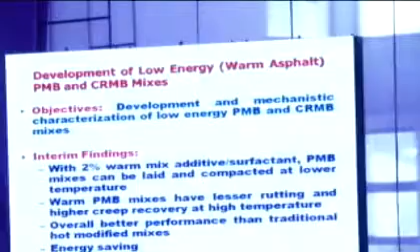First, development of low energy warm asphalt, PMB and CRMB mixes. The objective is development and mechanistic characterization of low energy PMB and CRMB mixes. Interim findings reported are that with 2% warm mix additive, polymer modified bitumen mixes can be laid and compacted at lower temperature. Warm PMB mixes have lesser rutting and higher creep recovery at higher temperature, with overall better performance than traditional hot modified mixes and energy savings.

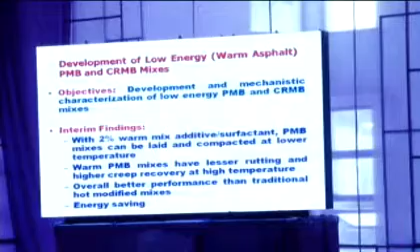Next, study on use of emulsion based warm mix asphalt using half warm aggregates for bituminous road construction. The objective of this R&D project is to investigate performance of emulsion based half warm mixes. Test sections have been laid near Gondal in Gujarat on NH-27, and it has been found that rutting resistance, indirect tensile strength ratio, and resilient modulus are acceptable and identical to traditional HMA mixes. Warm mix asphalt mixtures can be prepared and laid with conventional construction equipment.

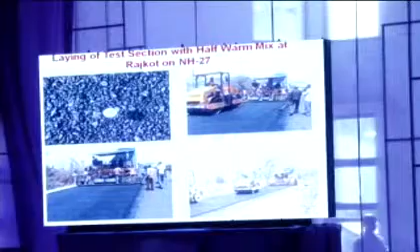These are the photographs relating to the preparation of the mixes and laying of the test section in Rajkot on NH-27. The next reported project is studies on use of reclaimed asphalt pavement, RAP, in construction and maintenance of roads.

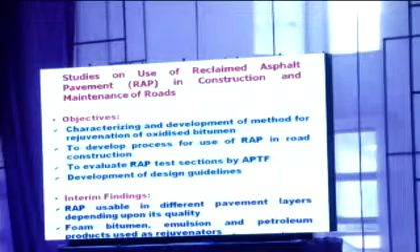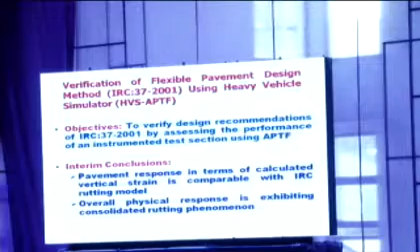Next project reported is verification of flexible pavement design methods, that is IRC 37, using heavy vehicle simulators available in CRRI. Objective is to verify the recommendations of IRC 37 by testing the test sections with heavy vehicle simulators, APTF, in CRRI. Test sections have been laid in CRRI campus and tested using APTF. Interim findings are that pavement response in terms of calculated vertical strain is comparable with IRC rutting models, meaning the observed strains are in agreement with the IRC rutting model, and overall physical response exhibits consolidated rutting phenomena.

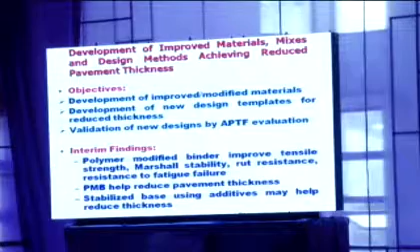Next project reported is development of improved materials, mixes and design methods achieving reduced pavement thickness. Interim findings are that using polymer modified binders helps improve tensile strength, marshall stability, rut resistance and resistance to fatigue failure of bituminous mixes, and also helps reduce overall pavement thickness. Stabilized bases are another option which can be used to reduce the overall pavement thickness.

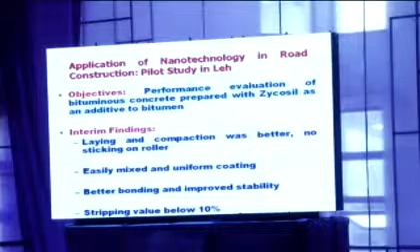Next is application of nanotechnology in road construction, a pilot study in Leh. Yesterday we saw a presentation from Zydex Industries, and the same materials have been reported in 2-3 projects. This was tested in a test section in Leh, and findings indicated that laying and compaction was better, with no sticking of the material to the roller when using Zycosil as an additive to the bitumen. The mix can be easily mixed, there is uniform coating of aggregates, better bonding, improved stability of mixes, and stripping values observed were less than 10%.

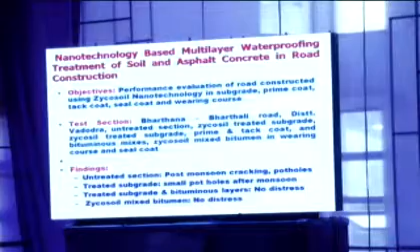It has been observed that in the untreated section where there was no Zycosoil, post-monsoon cracking and potholes were observed. In sections where Zycosoil was used only in subgrade, small potholes after monsoon were observed. But when Zycosoil was used in all the layers, there was no distress on those test sections. This suggests Zycosoil is proved to be a wonderful material, as the findings of these projects have shown.

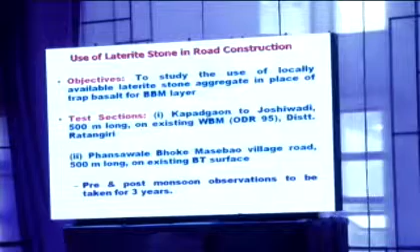Next is use of laterite stone in road construction. The objective of this study is to study the use of locally available laterite stone aggregate in place of trap basalt for BBM layers. Test sections have been laid in Kapadgaon to Joshiwadi and Masebao village in Maharashtra. The first section was laid on existing WBM surface, and the second test section was laid on existing BT surface. Pre and post monsoon observations have to be taken for 3 years, and interim findings are awaited for this project.

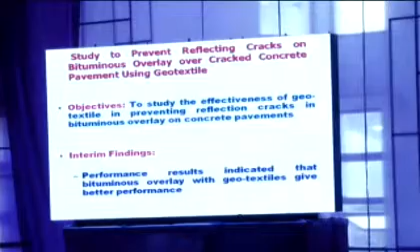Next project reported is a study to prevent reflection cracking on bituminous overlays over cracked concrete pavement using geotextile. Whenever a bituminous overlay is placed over an existing concrete surface, the joints get reflected into the overlay. Geotextile has been used to minimize this reflection cracking under this project, and it has been observed that bituminous overlay with geotextile gives better performance, mitigating the occurrence of reflection cracking in bituminous layers whenever placed over existing concrete pavements.

Next is resource mapping of road construction materials in Kerala, Thiruvananthapuram district. Under this project, whatever material is available in Thiruvananthapuram district has to be characterized, with all data relating to properties like specific gravity, water absorption, AIV values, elongation and flakiness prepared on a GIS platform so it can be readily accessible and usable by users.

Findings say that these locally available materials are fine for all other properties, but the combined elongation and flakiness index requirement as per MORTH is not fulfilled. Researchers have asked that in case of locally available material, MORTH guidelines should be relaxed so that they can be used at local levels.

Now come to the R&D projects which have been reported in rigid pavement sections. This time only 3 projects have been reported.

nothing is ongoing or completed.

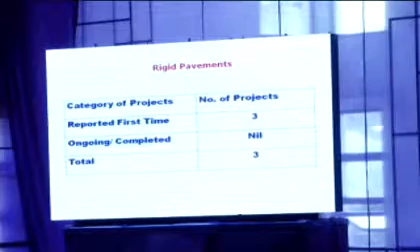This is really a matter of concern for all of us, because the future of Indian roads belongs to concrete pavements, and we need to carry out more and more research in concrete material as well as in concrete pavements. So I hope we all will take note of this.

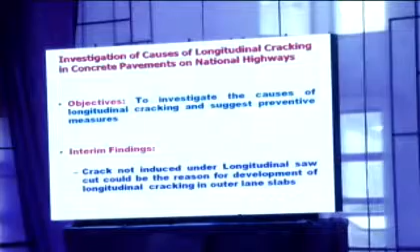Whatever projects have been investigated is investigation of causes of longitudinal cracking in concrete pavements on national highways. Something which does not crack is not concrete. In fact, during construction, we help concrete to crack by sawing the joints. We design concrete pavements in such a way that full depth transverse cracking will occur in the middle of the slabs near the expiry of its design life, that is 25 to 30 years. But...

In the last 8-10 years, whatever concrete pavement sections have been laid on national highways, many of them have shown premature longitudinal cracking in the outer lane. A project has been taken to investigate the reasons for this cracking. There are few known reasons, but there may be some unknown reasons as well, particularly responsible for Indian conditions.

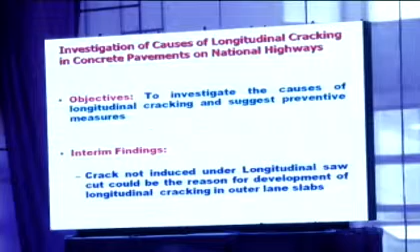Interim findings, from whatever work has been carried out so far, say that longitudinal saw cut joints between the outer lane and shoulder have not developed cracks under it. It should have happened, because that is the purpose of sawing the joints. Since the joint has not occurred, you can see these saw cut joints - the core is showing the saw cut joints, and there is no crack under this. This could be one of the reasons that cracking is taking place in the middle of the outer lane. And this has happened on all sites.

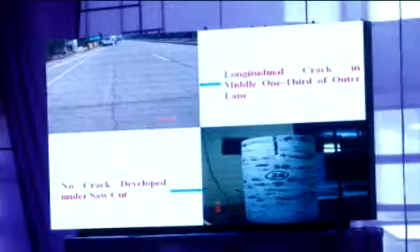So we are putting a joint between shoulder and outer lane. We have to think about whether it is workable, or whether we should go for deeper saw cut depths at these longitudinal joints so that the crack happens there. Normally it is 1/3 to 1/4, but I feel we need to increase the depth of saw cut in case of longitudinal joints. In case of transverse joints, it is fine.

Next project observed is utilization of waste foundry sand in place in pavement quality concrete. Waste foundry sand is a waste product of foundry industries. It is a very fine sand, and when it has been used in pavement quality concrete mixes, it was observed that because of the higher fineness of this sand, water demand of the mix keeps increasing, and if you keep increasing the water in the mix, the water cement ratio will be high.

A downfall in strength has been observed. But up to 20% replacement of natural sand by foundry sand, we can modify the mix so that whatever increase in water demand is there, it will not lead to any downfall of the compressive and flexural strength. That is manageable up to 20%, but beyond that it is difficult.

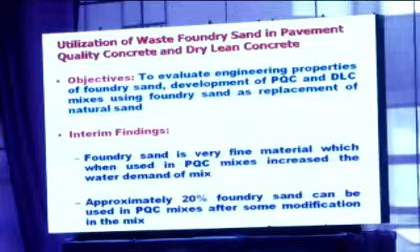Next is calcium sulphate derived from tannery fleshings for use in cement formulation. A lot of lime is used by the leather industry for tanning purposes, and whatever effluent comes out of this industry, before it is allowed to flow into rivers, some neutralization treatment has to be given to these effluents. Lime is used, and that lime can be reclaimed in the form of calcium sulphate from that effluent. That calcium sulphate can be used for the ternary and binary production of cementitious materials. This has been reported in this project.

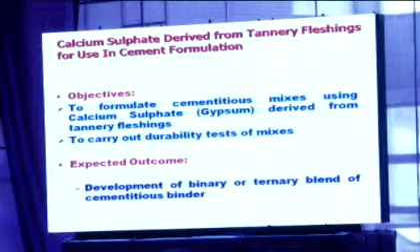Now, pavement evaluation performance - 7 projects have been reported for the first time, 2 are ongoing, and overall 9 projects have been reported. First is road inventorization and pavement condition survey on selected road stretches using vehicle mounted digital video imaging system. The objective is to prepare road inventory and pavement condition survey data for about 1200 kilometers of national highway using automated road survey systems and network survey vehicles.

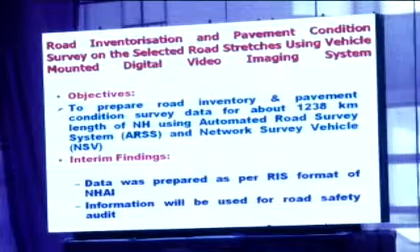So far, data has been collected and prepared as per the RIS format of NHAI. Whatever data has been collected and submitted to NHAI will now be utilized for the road safety audit of these national highway stretches.

Next reported is development of a management system for maintenance, planning and budgeting of high-speed corridors. The objective of this project is to calibrate the HDM-4 software for Indian conditions. It requires a lot of data related to pavement performance and geometrics of pavements, and time series data is being collected. We have already completed 2 series of data, calibration of HDM-4 is in progress, and the 3rd series of data will be utilized to validate the calibrated model. It is in progress.

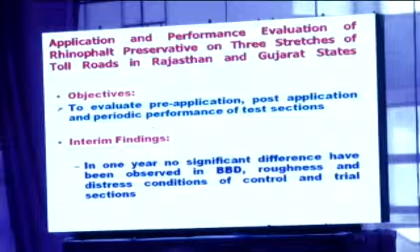Next is application and performance evaluation of Rhinophalt preservative on 3 stretches of toll roads in Rajasthan and Gujarat states. 3 test sections have been laid on toll plazas, and it was observed that in 1 year, no significant difference has been observed in BBD deflections, roughness and distress conditions of control as well as trial sections. It is hoped that in the next 2 or 3 years, the difference of using Rhinophalt will be observed by performing observations on control and test sections. But so far, no difference has been observed.

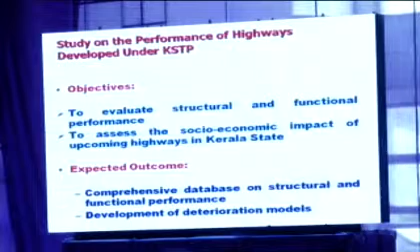Next is study on the performance of highways developed under KSTP in Kerala. The objective is to evaluate structural and functional performance to assess the socio-economic impact of upcoming highways in Kerala state. It is expected that through this project, a comprehensive database on structural and functional performance of the state highways will be prepared, and deterioration models will also be prepared that will help in assessing budget requirements for maintenance of state highways in Kerala.

Next is performance evaluation of coir geotextile in rural roads of Kerala. Coir geotextile has been used to lay few test sections where strengthening of the weak soil was required, and it is expected that innovative design procedures for long-lasting rural roads will be prepared using coir geotextiles for the strengthening of weak soils.

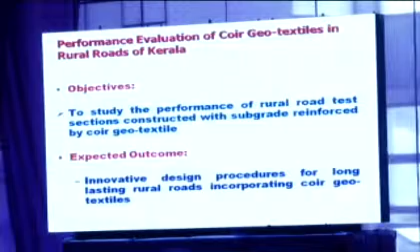Next reported is pavement performance studies, also on coir geotextile reinforcement in rural roads of Tamil Nadu. The objective is again the same, to study the performance of rural roads with subgrade reinforced by coir geotextile, and it is expected that innovative design procedures will be developed suitable for the soils which Tamil Nadu state has, with coir geotextile used for strengthening of weak subgrade soils.

Then urban pavement management system for Tiruchirappalli city. This project has been undertaken to prepare a pavement management system for urban conditions. First it will be developed for Tiruchirappalli city, and then the same can be utilized for assessing the need of maintenance and budget needs for other cities of the state.

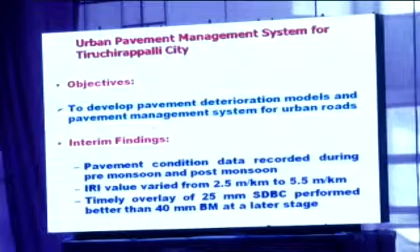Points for discussion: PMB, CRMB and emulsion based warm mix asphalt mixes. Validation of flexible pavement design using accelerated pavement testing facilities. Reclaimed asphalt pavements. Use of geotextile for better performance of pavements. Premature longitudinal cracking of concrete pavements. Development of pavement management systems.

The organizations which have reported all these research projects are CSIR Central Road Research Institute, New Delhi; National Transportation Planning and Research Center, Thiruvananthapuram; Gujarat Engineering Research Institute, Vadodara; Maharashtra Engineering Research Institute, Nasik; National Institute of Technology, Tiruchirappalli; and Messrs. Gypsum Industries. That's all from my side.

I hope next year we will be intensifying our R&D needs, and more projects will be upcoming in the area of pavement management, pavement engineering and materials, and particularly in the field of concrete pavements. Thank you very much.

Thank you, Mr. Vinod. As we observe, the presentation made by Shri Vinod Kumar has highlighted many issues important in today's context. We are all, in all sectors of highway projects, facing the problem of availability of good quality aggregates. So in the 12th plan, in the area of pavement engineering and materials, one task for researchers should be how to save aggregates.

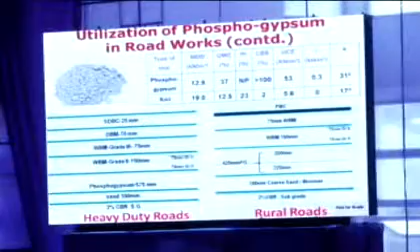The first project: utilization of phosphogypsum in road works. Phosphogypsum is an industrial waste generated from the fertilizer industry. The main objective is how to utilize this phosphogypsum for road and embankment construction. It is a low density material compared to maximum dry density, and the CBR value is very high, with good shear strength properties compared to local soil. Specifications have been prepared for heavy duty roads and rural roads. The main finding is that phosphogypsum as such is good enough for use in different pavement layers.

7% of phosphogypsum can be used in BM, DBM and SDBC mixes. 10% cement can be replaced by phosphogypsum in M40, M35, M30 and M25 concrete. For dry lean concrete, 10% cement can also be replaced by phosphogypsum.

Feasibility of cinder waste dumps for building and road construction. Cinder is a waste generated from the steel industry. This dump is nearly 70 years old and 45 meters high, and is a mixture of 80% cinder and 20% slag. The main objective is how to utilize the cinder waste for embankment and road construction, and how to reclaim the cinder waste dump.

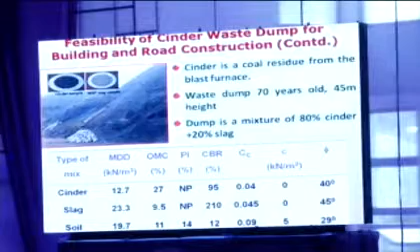The cinder and slag both have excellent geotechnical characteristics compared to soil, so this material has potential for embankment construction. 40 to 60% of the cinder material can be used as a replacement for fine aggregates in sub-base and base material. The main limitation is that cinder is not feasible for bituminous layers of road pavement.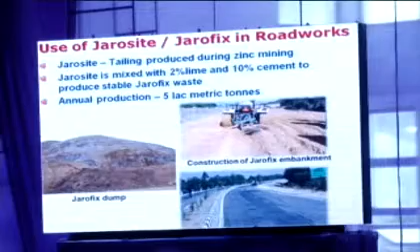Use of jarosite or jarofix in road works. Jarosite is a waste produced during zinc extraction. Jarosite is mixed with 2% lime and 10% cement to stabilize the mix. The annual production of jarofix is around 5 lakh metric tons. These photographs show construction of a test track near Chittorgarh, Rajasthan.

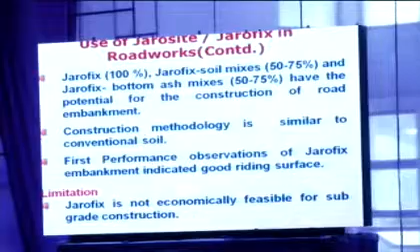The major findings: jarofix mixes and jarofix bottom ash mixes have the potential for construction of road embankments. The construction technology is similar to soil. Initial performance observations of jarofix embankments indicated a good riding surface. But the main limitation is that jarofix is not economically feasible for subgrade construction.

Ongoing and completed projects: feasibility study of super fine copper slag. Copper slag is waste generated during the extraction of copper, with annual production around 2.5 lakh metric tons. The main conclusion is that it satisfies the MoRTH and MORD criteria.

Because it is a non-plastic material, side covers are required. About 15% of the fine copper slag can be used as a replacement of fine aggregates in DBM and BC mixes.

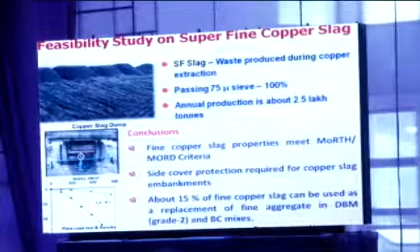Design of approach embankments of the Signature Bridge across Yamuna River, Wazirabad, Delhi. The stagnated water level here is 1.5 to 2 meters. Initially they proposed filling this area with sand, but getting sand was very difficult, so fly ash was used as a filling material in the waterlogged area. This is the design cross section, and the embankment was constructed successfully. During construction, floods occurred, but the embankment remained stable even during floods.

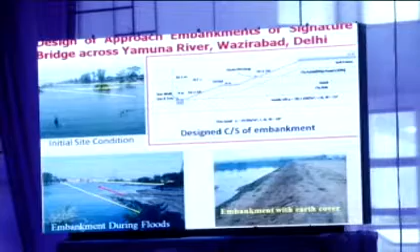Design of remedial measures at Lukhbir slide. This slide is located at 26.8 kilometers on the national highway, a lifeline for Arunachal Pradesh and Sikkim states. Remedial measures have been designed: the uphill slope stabilized with soil nailing and shotcrete, and the downhill slope stabilized with a 10 meter cantilever wall with cladding and steel anchors.

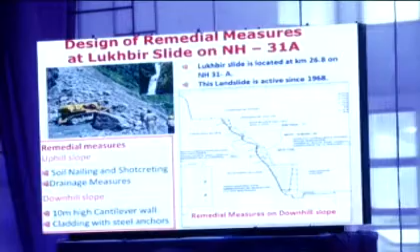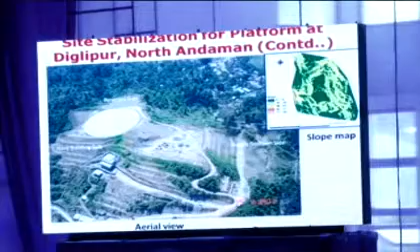Site stabilization for platform at Diglipur, North Andaman. This site is located around 320 kilometers from Port Blair. Around 3.5 lakh cubic meters of material was excavated to create a platform, but it was dumped very loosely without proper compaction, which created two slides. Remedial measures have been suggested for stabilizing these slides.

Development of guidelines on management of landslides on Indian highways and roads. There are a total of 8 chapters in these guidelines. Already 5 chapters have been circulated, and the remaining 3 chapters are under preparation.

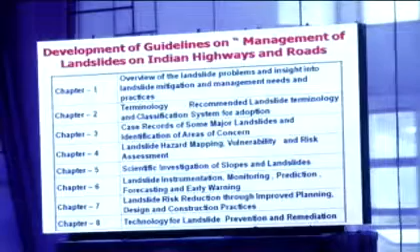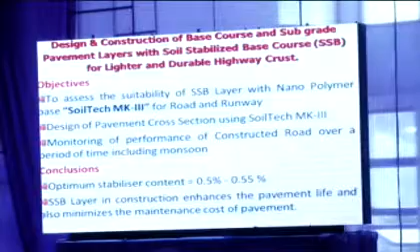Design and construction of base course and subgrade pavement layers with soil stabilized base course for lighter and durable highway crust, to assess the suitability of the soil stabilized layer with a nano polymer, Soiltech MK3, for road and runway. Design of pavement cross section using Soiltech MK3, and monitoring of performance of constructed road over a period of time, even during monsoon. Main conclusion: the optimum stabilizer content is 0.5 to 0.55%. The SSB layer in construction enhances pavement life and also minimizes the maintenance cost of pavement.

Points for discussion: utilization of waste material for road construction, importance of geotechnical investigation for road projects, use of geosynthetics in road works, and adopting soil stabilization techniques.

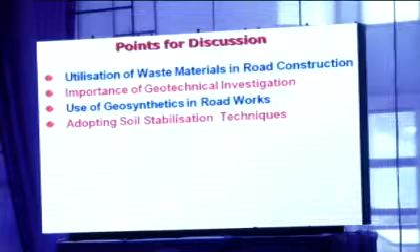Thank you, Mr. Prasad, for making the brief presentation of the R&D work done in the area of geotechnical engineering, including soil stabilization, landslides and ground improvement.

As we all know, we have enormous alternate resources which can be used as pavement materials, at least for construction of base courses, sub-base courses, etc. The only challenge to the researchers is to develop technology out of R&D work and guidelines and specifications, so that this wealth, which is not waste, can be utilized in construction of the various pavement layers.

We should aim in this 12th plan to come up with effective utilization technologies using waste materials in road construction. We have enormous economic loss due to landslides, and we have done good work to control and investigate landslides. We should have techniques where we can predict natural disasters well in advance, and we should focus on those areas in the 12th plan.

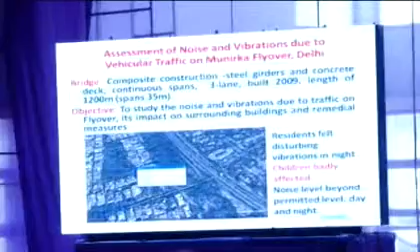Next one reported was the assessment of noise and vibrations due to vehicular traffic on Munirka Flyover in Delhi. This is also a composite construction where the steel deck was constructed due to fast construction, and the RCC overlay deck was constructed. This was constructed in 2009. This is a 3-lane bridge, and it is a continuous bridge of nearly 35 meters span each. The flyover is nearly 1.2 kilometers long.

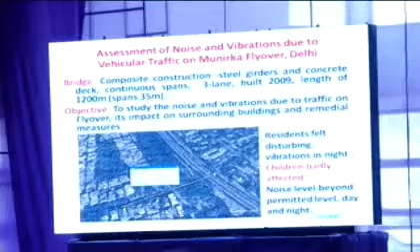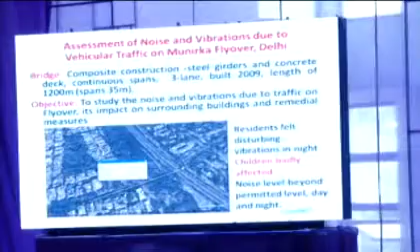As one can observe, the flyover, particularly at night, the traffic density increases, and the residents were feeling within say 200 or 250 meters, the residents were feeling very high levels of noise and high levels of vibration. Children were particularly affected, and it was reported in the paper that many of the infants were finding difficulty during feeding.

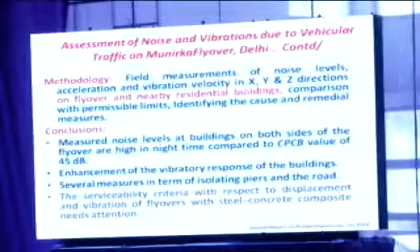I want to highlight the methodology, that vibration sensors were utilized in the form of acceleration and vibration velocity in all 3 directions. This was carried out on the flyover as well as on the buildings, and comparison was made, and the cause as well as remedial measures were suggested.

It may be interesting to note that due to plying of heavy vehicles on the flyover, the residents in buildings were feeling very high noise levels, much higher than the Central Pollution Control Board recommendations. Similarly, the vibratory response was quite high.

Several remedial measures were suggested, which include the isolation of piers, starting from the foundation level of the piers, at least up to 2.5 meters below ground level, where rubber pads were introduced and sand was filled. This is one of the simple techniques of isolation, and similar isolation was carried out on the edges of the roads, so that maximum reduction of possibility of vibration was ensured while reducing the vibration to buildings.

Here it is a very important aspect that serviceability aspects, particularly the displacement and vibration caused by the composite construction, we need more and more research and some more guidelines.

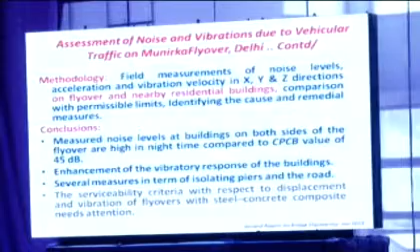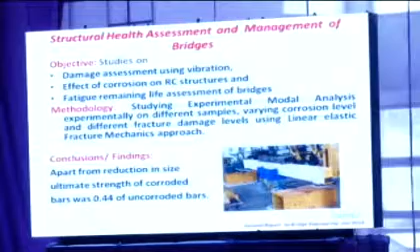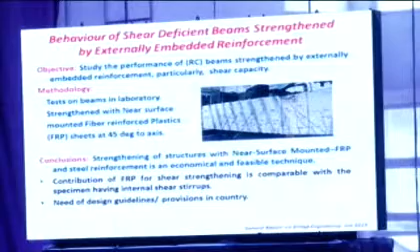The next study is about the behavior of shear deficient beams strengthened by externally embedded reinforcement. This study was carried out on embedded reinforcement in the laboratory, and one can note that particularly for shear deficient beams, the inclined FRP sheets were put on the outside of the beam while creating grooves, so that it is called the near surface method, where one cannot even find what material has been put on the surfaces.

The conclusions were very important, that strengthening of structures with near surface mounted FRP and steel reinforcement is an economical and feasible technique. Contribution of FRP for shear strengthening is comparable with the specimen having internal shear stirrups, and that is a very important finding. But there is still some need of concrete guidelines and provisions in the country. IRC as such doesn't cover this at present, so many engineers find it difficult to use.

Next is about the mathematical modeling of repaired concrete structures. It highlights the external pre-stressing technique for strengthening, and these studies were carried out in the laboratory. The important conclusions were that the numerical model of flexural capacity of RC beams strengthened by external pre-stressing compared well with the experimental results. The external pre-stressing with trapezoidal tendon profile performed better than deviated and straight tendon profiles in increasing flexural capacity, deflection recovery, and reducing deflection in the post-strengthening stage. Further, 10% loss of pre-stress was observed due to friction at deviation.

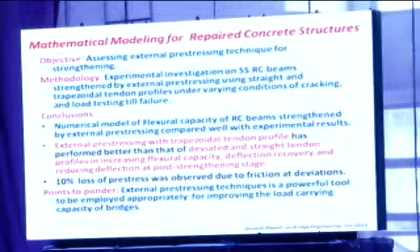This is important to note while carrying out the mathematical model. I must say that the external pre-stressing technique is a very powerful tool, and more studies are to be carried out so that prediction from such a study can be used directly by engineers.

The ongoing projects are there: development of a structural health monitoring scheme for civil engineering infrastructure using smart sensing techniques.

The methodology is simple: they have used iMote2 type of a node, where wireless sensing techniques are utilized, along with the electromechanical impedance technique with piezo patches. The findings are still at laboratory stage, including the iMote2 type and EMI for inspection and evaluation. These are useful, and some more results are yet to come.

Another aspect is generating a facility or equipment for investigation of bridges, particularly underneath and the deck, which is very difficult to reach. Therefore, a mobile bridge inspection unit is being created, aimed at catering to the needs of 2 and 3 lane bridges. This system has been developed and is under testing studies.

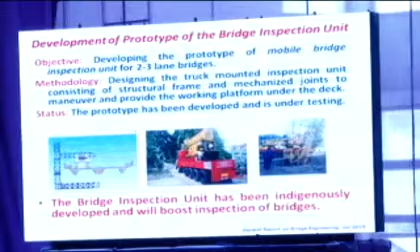Next is the study of corrosion susceptibility of steel reinforcement protected with anti-corrosive coating treatments on ordinary and high performance concrete. The objective was particularly related to comparison of uncoated and coated bars on HPC concrete. Everybody knows coated bars perform well, however, when we carry out a mathematical model or assess post-corroded behavior, such study plays a very important role. The methodology was to apply a combination of HPC mixes in the laboratory.

Interim findings are there, but some numbers are not available. As can be expected, the performance of coated reinforcement is quite encouraging. Still some more results are to come so that it helps in preparing the appropriate mathematical model.

Another is creating a facility for complete independent testing of expansion joints indigenously. To establish the complete testing facility, they have created a large number of testing facilities, including raw material in the form of chloroprene and steel. It also involves mechanical testing, cyclic motion test, debris expulsion test, pull-out test, opening movement vibration test, fatigue test, and seal push-out test.

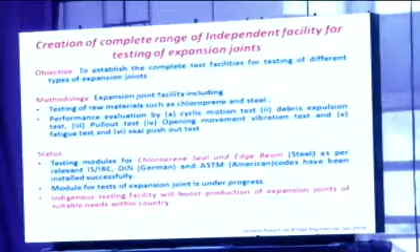There are many themes of discussion, a few listed here. Distress diagnostic and rehabilitation of PSC girder bridges needs attention because a large number of such bridges are under stock of national and state highways. New techniques for structural health monitoring are always needed, so that quickly one knows the health of infrastructural stocks and appropriate measures can be taken in time.

Development of tools for bridge management and their implementation is a much broader aspect where we start from inventorization to the repair stage, and getting such inventory or inspection reports of a bridge is a difficult task. Therefore, I urge on this platform that all engineers and researchers come together and put efforts towards success of the bridge management system in India.

Efficacy of strengthening and rehabilitation technique of bridges, assessment of noise and vibration induced by movement of heavy vehicular traffic on bridges and flyovers, and their impact on nearby buildings. Although this phenomena has been observed, more complaints are coming that due to heavy traffic, nearby residents are feeling more disturbed. There are certain guidelines on environmental assessment rules and codal provisions, but how to implement them and assess the structures is an important need of ours.

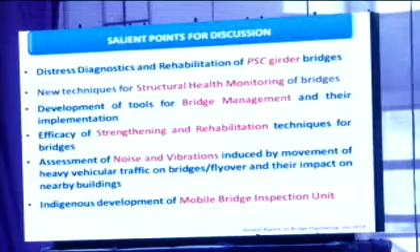The last one is about the indigenous development of mobile bridge inspection unit and other laboratories.

There are a few theses reported about development of techniques of in situ stress assessment in concrete structures, application of pushover analysis of RC bridges, experimental study of RC beams strengthened with CFRP fabric under pure torsion, analysis of anchorage zone stresses in post-tension girder bridges, and effect of overweight vehicles on RCC girder bridges.

I must request that many researchers and students do not report their results. Whenever such theses are complete, please send information to IRC so that they can collect and incorporate them in road research. The list of organizations includes the following.

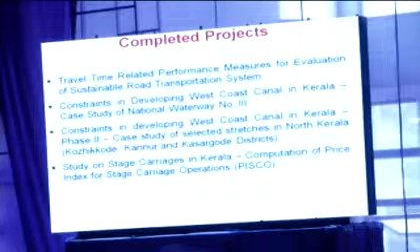In this category, 4 projects are reported: travel time related performance measures for evaluation of sustainable transportation system; constraints in developing West Coast Canal in North Kerala; constraints in developing West Coast in Kerala phase 2; and study on stage carriage in Kerala.

Coming to some of the salient features of these completed projects: first, the project titled travel time related performance measure for evaluation of sustainable transportation system. The objective of this study is to identify the various performance measures and study the uncertainties of travel time under the various influence of factors from the supply side as well as the demand side.

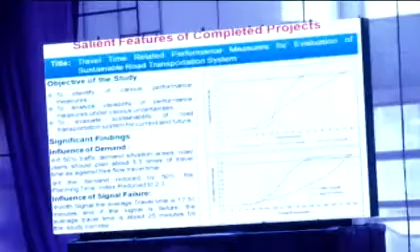In this study, the identification is how travel time varies compared with normal traffic demand, if demand is increased to 50%, and if demand is reduced by 50% as compared to normal demand.

It was identified that if demand increases, travel time is increased 3.5 times as compared to the free flow travel time. If demand is reduced, it will be reduced to 2.3 times as compared to free flow travel time. Similarly, this study also identified supply side factors influencing travel time variation.

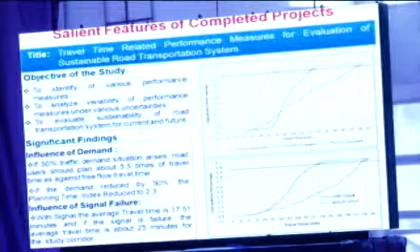For this study, the urban arterial corridor identified was in Delhi, a 2 kilometer length corridor starting from Apollo Hospital to Badarpur border. In this case, if the signal fails, travel time is affected: the average travel time when the signal works is 17 minutes, and when the signal fails, it becomes 25 minutes.

Coming to another project, the salient features of completed projects: constraints in developing the West Coast Canal in Kerala phase 2. The objective of this study is the study of waterway navigability in North Kerala, identification of proposed waterway routes, and identification of constraints of cargo movement.

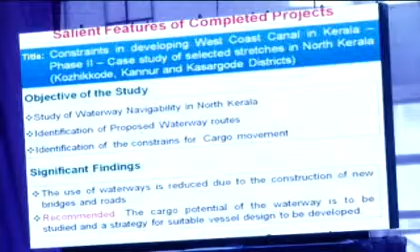Coming to the ongoing projects, 4 projects were identified: feasibility study and requirement of pedestrian underpass or vehicle underpass between the Palanpur, Deesa, Radhanpur section of NH14 and NH15; comprehensive traffic and transportation studies of Goa; preparation of inventory of roads for 2 block panchayats in Kannur district; and development of a toolkit on analysis of urban traffic systems.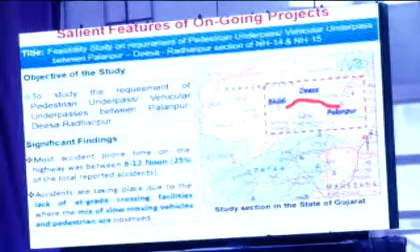I would like to discuss some salient features of these ongoing projects. The feasibility study on requirement of pedestrian underpass or vehicle underpass between Palanpur, Deesa, Radhanpur section of NH14 and NH15 falls in Gujarat state. Its main significance is to identify accident-prone locations, mainly accidents occurring between 8 a.m. to 12 noon. The study identified that most accidents took place on the corridor due to lack of at-grade facility and mixed slow-moving traffic on the main road.

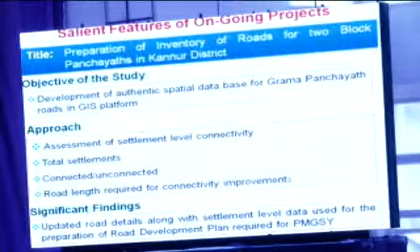Coming to another project, preparation of inventory of roads for 2 block panchayats in Kannur district. The objective of this study is development of an authentic spatial database. The approach considered settlement level connectivity, total settlement connectivity or unconnectivity of village habitations to the network, and road length required for connectivity improvements. The main significance is the authentic database developed for further district rural road plans and core network plans, useful for PMGSY guidelines.

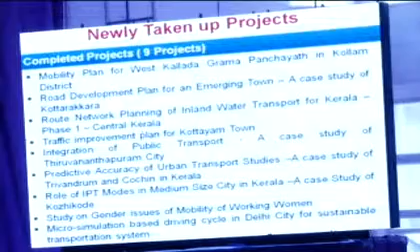Now coming to the newly taken up projects, 9 projects are reported in this category, as listed here.

I am discussing salient features of some of the newly taken up projects which are completed recently. The first project is micro simulation based driving cycle in Delhi city for sustainable transportation system. The objective is to derive the driving cycle by considering on-ground real-world data and comparing it with micro simulation tools.

In this study, 9 urban arterial corridors were considered in the Delhi road network, and 2 categories of vehicles were studied. In this figure, the horizontal axis is time and the vertical axis is speed, comparing the micro simulated output with raw data collected on the ground using V-box, velocity box data.

This is the main significance: collection of raw data is more expensive and time consuming. Using simulation tools, we can model the data, and this model can further be used in studies to estimate fuel consumption as well as air pollution.

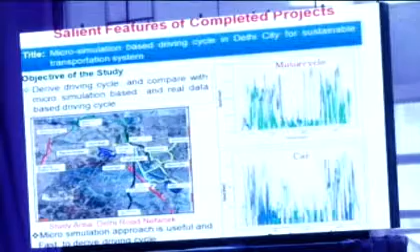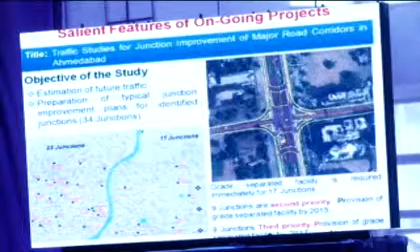Salient features of some of these projects are discussed here. One project is traffic studies for junction improvement of major road corridors in Ahmedabad. The objective is to estimate future traffic for the next 10 years at particular intersections. In this study, a total of 34 intersections were identified and distributed along the road network, entire urban road network of Ahmedabad city.

Data was collected and forecasted for 10 years, identifying which junctions have to be prioritized for at-grade or grade-separated improvements. It was identified that grade-separated facilities are required immediately for 17 junctions, 9 junctions are required by year 2015, and 8 junctions are third priority requiring grade separated facility. Junction improvement drawings have also been submitted.

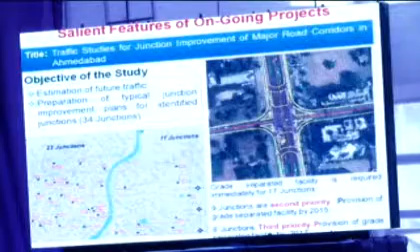Coming to driving effect on visual fatigue and blood pressure of drivers, the objective is to identify visual fatigue before entering the on-stream road and after driving, measuring how blood pressure and fatigue of the person change.

For this, pilot data from 15 drivers was collected, and another 56 drivers were included in the entire project. The age group of the sample is between 26 and 36 years. It was identified that BP as well as visual fatigue values were higher, with post-trip values higher compared to pre-trip.

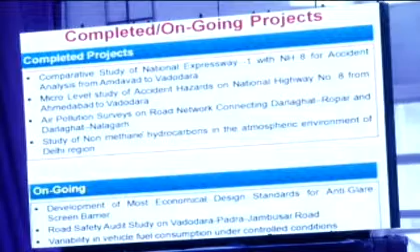Coming to part 2, safety and environment, in this category 4 projects are completed projects and 3 projects are ongoing projects.

One of the salient features of the ongoing projects discussed here is variability in vehicle fuel consumption under controlled conditions. The objective of this study is to investigate the variability of fuel consumption under steady speed conditions.

The study area has been discussed, and different steady speeds from 20 to 70 kilometers have been considered. The vehicle will run along the section at a steady speed of 20 kilometers, and the variance will be identified. It was found that about 8% variability exists in fuel consumption for every steady speed, and the relationship between speed and fuel consumption for various speeds follows a second order polynomial, discussed for both the onward and return journey.

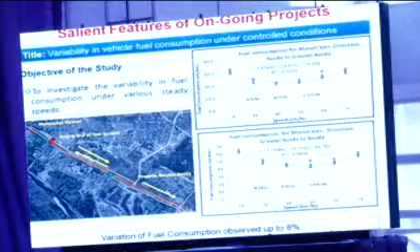Coming to the newly taken up projects, completed projects number 5 in this category. I am discussing here the salient features of the newly taken up projects which were completed.

The identification of accident prone locations and improvement measures on National Highway number 17 and 212 segments in Kozhikode district, Kerala. The objective of this study is to collect accident details pertaining to the past 4 years, analyze the accidents and causative factors prone to accidents, and carry out micro level analysis of accident prone locations. The approach methodology involves data collection, and analysis carried out based on the quantum of accidents. This study also estimated an accident risk index.

The findings of this project show the accidents have been formed into groups assigned scores based on the number of accidents. The accidents have been categorized based on the quantum of accidents, and considering various parameters, the accidents have been given a scoring.

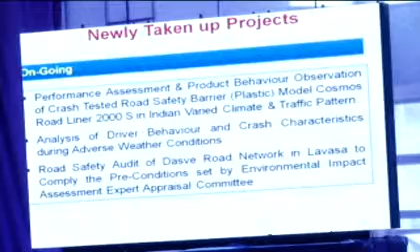Coming to the newly taken up ongoing projects, 3 projects are reported in this category. The first project I am discussing here is the ongoing road safety audit of the Dasve road network in Lavasa, to comply with the preconditions set by the environmental impact assessment. The objective of this study is to conduct the road safety audit of the Dasve road network in Lavasa.

This study has been carried out with a proposed methodology; this is an ongoing project and findings are yet to be reported. The methodology adopted includes safety audit on existing roads, monitoring what are the existing lacunae on the road network and the geometric features, as well as other influencing factors.

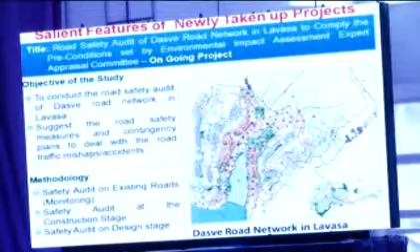Coming to safety audit at the construction stage, what problems during construction will influence road safety. And coming to safety audit at the design stage, the highway geometric elements including horizontal and vertical elements, as well as other cross-sectional details, have been considered in the road safety audit of this project.

Coming to the thesis dissertation works reported for the year 2011 and 2012, I have categorized them into 4 different categories. Transportation planning related studies, 19 thesis works are reported in this category. These studies mainly focus on land use and transportation planning, traffic assignment and dynamic traffic assignment, GIS-based bus stop location identification, and development of a GIS-based framework to plan and monitor PMGSY roads.

Coming to the next category, traffic engineering, 20 thesis works are reported. In this category, works are mainly carried out and reported on capacity analysis, road user cost studies, ITS applications in traffic engineering, congestion analysis in urban arterial corridors, and analysis of road accidents.

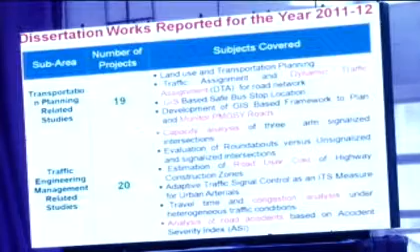Third category, advanced modeling techniques. In this category, 4 theses were identified and reported. These works mainly focus on fuzzy logic, a linguistic approach to model mode choice behavior in transportation planning, simulation of vehicle queuing at toll plazas, and micro simulation based studies including modeling of heterogeneous traffic conditions commonly observed on Indian road networks.

The 4th category is vulnerable road user studies, with 4 studies identified in this category.

Mainly focused in this study are facilities of pedestrians as well as slow moving vehicles, and also micro simulation based studies for slow moving vehicles and pedestrians' influence on accident prone areas. Road safety with emphasis on non-motorized traffic.

Various reporting organizations are listed in this category. Research works from academic as well as research institutes: CRRI Central Road Research Institute, College of Engineering Trivandrum, IIT Madras, NIT Calicut, NIT Surathkal, NIT Tiruchirappalli, NIT Silchar, NIT Warangal, NIT Surat, Gujarat Engineering Research Institute Vadodara, Maharashtra Engineering Research Institute Nashik, National Transportation Planning and Research Center Thiruvananthapuram.

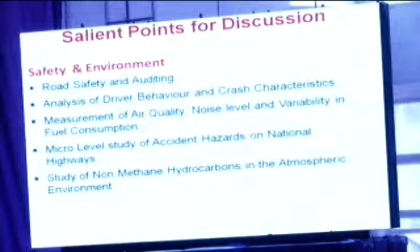That is the reporting of the salient features of my presentation. Thank you so much.

Thank you, Dr. Ravi Shekhar, for a very brief presentation of the research work done in India in the area of traffic engineering and transport planning. We all agree that the issue of accidents, road safety, and health of people due to effects of environmental pollution or noise pollution are issues of societal concern, which can be solved by a sustainable transportation system and better auditing of safety issues on roads.

Now the time is for discussion. I invite all four speakers on road research in general report to come to the dais, and then we can take up question and answer from the public. We may take up the issues which we want to flag for research in coming years during the 12th plan, and what is the need of the highway sector for research to be taken up by researchers. Then after the question answer session on the general report on road research, we will take up research presentations, followed by summing up of the session by co-chairman Shri Amla.